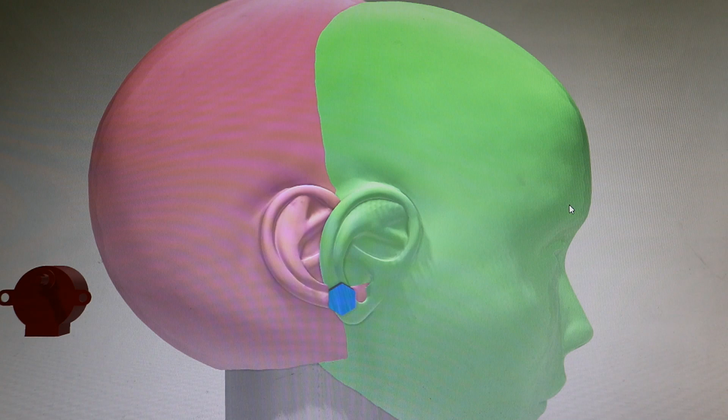My godfathers, what is he doing now, I hear you cry. Well, I feel a bit of a cheat because I haven't got anything physical to show, which is one of the issues with 3D printing. That you do it all, it's all virtual until you actually get around to printing anything.

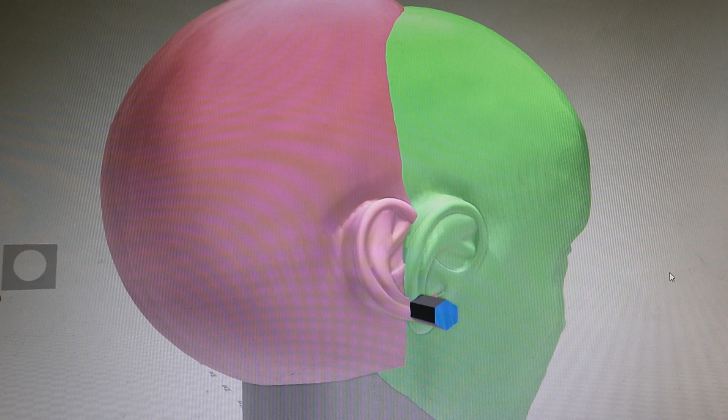And because this head, Victoria, the new Automaton's head, is far more complicated and larger than Florence's was, it is taking ages and causing me lots of headaches. So I've got to the stage and I thought, I've got to make a video because otherwise I'm just going to carry on and never get round to it. And I'm going to forget how I've done things and what I've done.

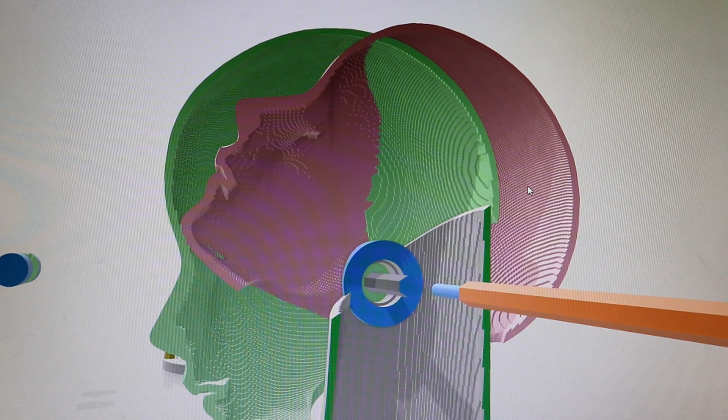So the stage at the moment is, this fine morning with no rain at the moment, is that after much umming and ahhing, and this is the other problem with 3D printing, is you have no constraints really. If you can imagine it, it's probably possible to print it. So, with the aid of my pointy finger, this is going to be brass hex rod.

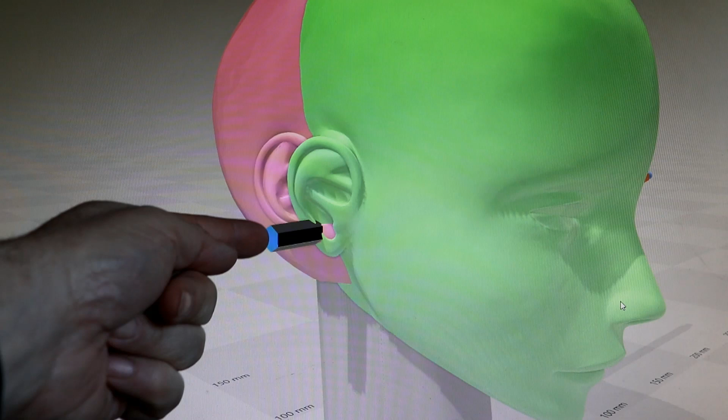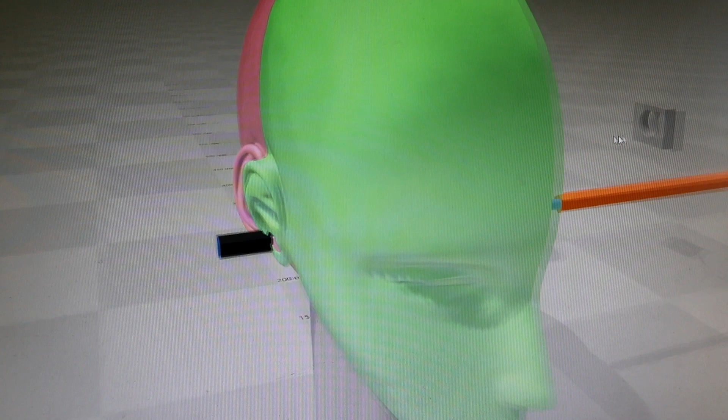I've finally decided how I'm going to, I've obviously not done the fun bit first, no. You know, like the eyes and the mouth. Oh no, start on the most complicated bit first. Oh dear, talk about work ethic. So I've been working on the way of getting her head to angle, look up and down in effect. In the end I've decided to go with the Frankenstein look, which I've got to work something out about.

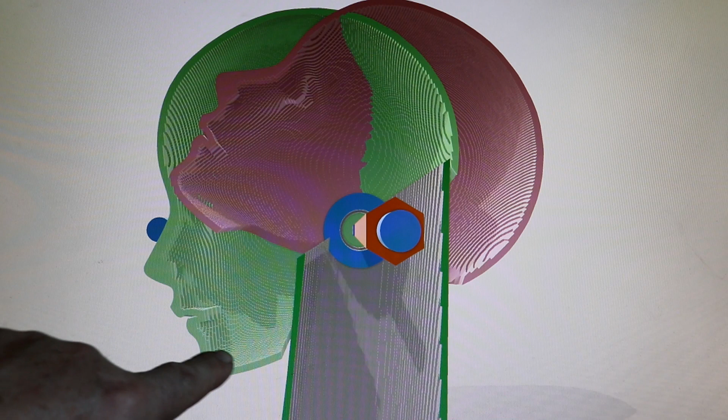What's going to happen is, and there's these two colour heads, just so that while I'm working on this I can actually see the maximum minimum movement. So here, for example, let's get it in view, the pink one is with her looking up as high as possible to make sure this time, doing it properly, that when she's looking up there is room at the back, there's clearance for the neck to go inside. And the green one is when she's looking right down, and again there's clearance there, and I've worked out the position of the axle in the middle.

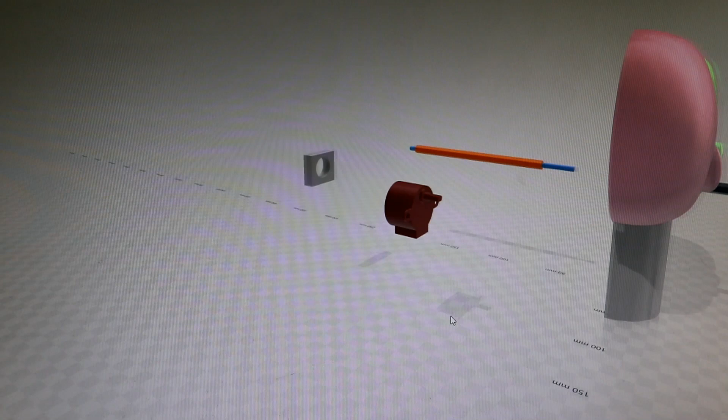What I was originally going to do was, and here's one I modelled earlier, one of these lovely little motors that I've witted on about before, and I might interject a little demonstration just to get into the real world and out of the virtual world. So that might appear in a minute. A quick impromptu explanation of how you can make machines turn, or your inventions.

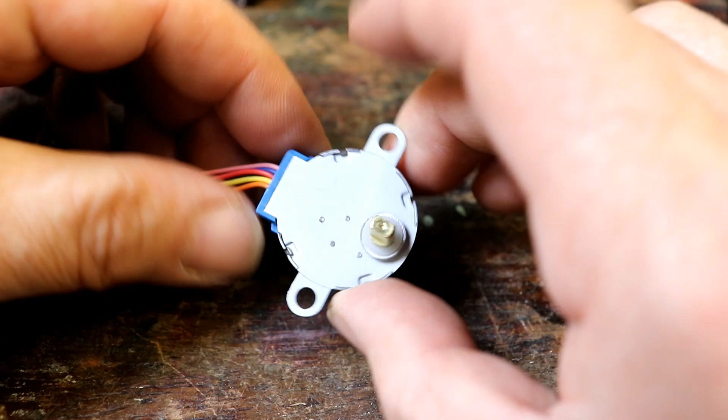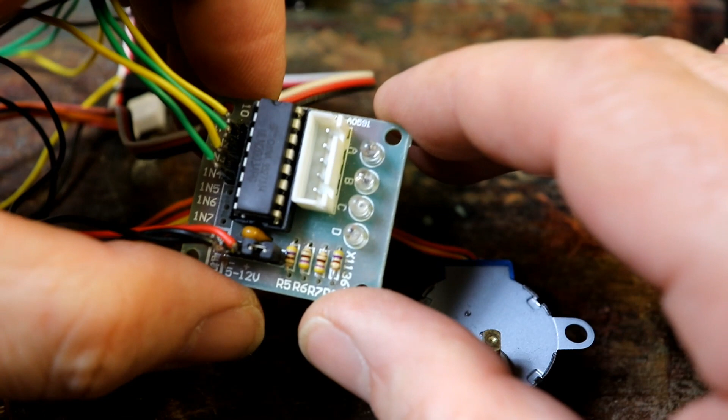Like I said, there's the little mini stepper motor, and these are mass produced for use in air conditioners and things. They come with their own version of this, the little driver board, because each of the 4 coils in the stepper motor inside draws quite a lot of current, uses quite a lot of electricity.

It plugs into this, there's an integrated circuit here that turns a very small voltage that you deliver from your Arduino or Raspberry Pi or something into a much larger current that can drive the motor. It also has 4 LEDs, which is useful, I assume, as an aid to servicing air conditioners and things, because if these aren't flashing on and off, you know the problem lies somewhere this side of things. If they are flashing on and off and the motor isn't turning, you know it's on this side of things.

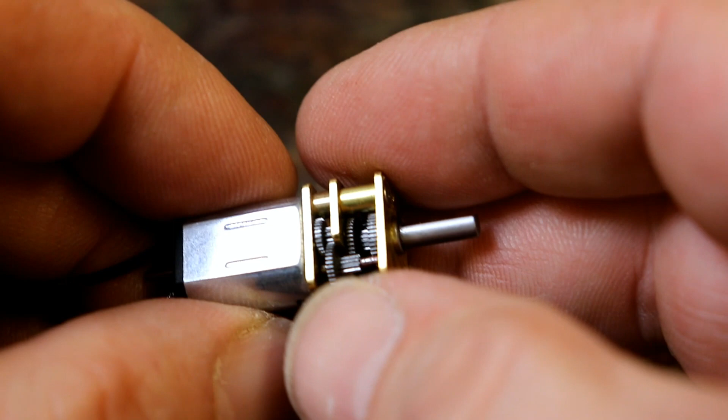So there's that, and there's the servo motor, which I just mentioned to you, and there's this amazing little thing. I think I'm zoomed in as much as I can. No, I'm not. These are absolutely incredible. This is a miniature version, but you can get them in all sorts of different gear ratios. Beautiful little gears. I bought this because I was going to use it on something, and I can't remember what it was. I think it was the climatic revelator, when I was thinking about how I was going to drive it.

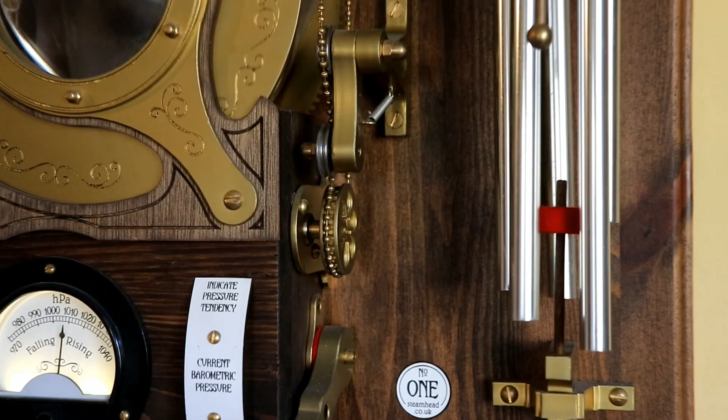The downside of these are, if I can switch a power supply on and switch this on, yeah, there we are. Beautiful. I was thinking I could put a magnifying glass over the little gears so that you could see them all turning. So that's fantastic. And this is on 3 volts. It's geared down so much that I can't stop it.

Downside is, as soon as you mount this on something, that happens, because the friction between all the gears creates lots of noise, and that's what stopped me from using it. Because the little motor at the back, this bit is whizzing around so fast, you get to hear that. And I tried mounting them in sort of silicone rubber surrounds and on springs. Just no good. Not for things if you want them nice and quiet, which is a shame.

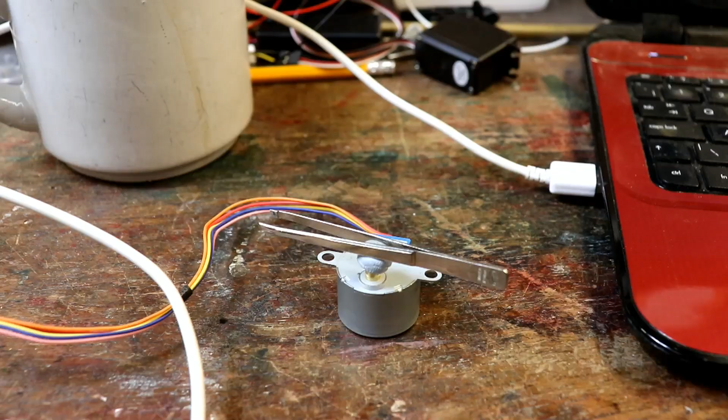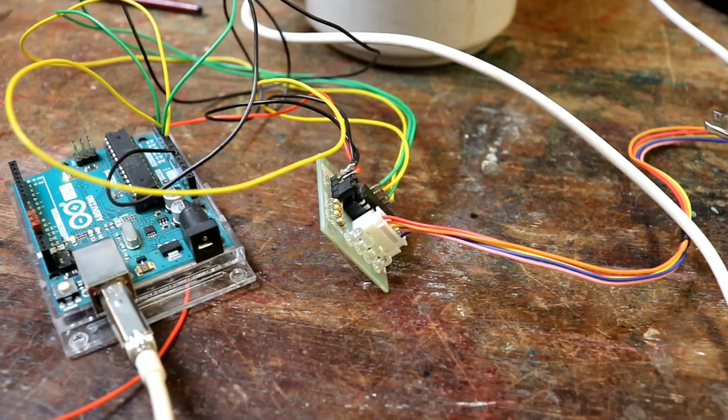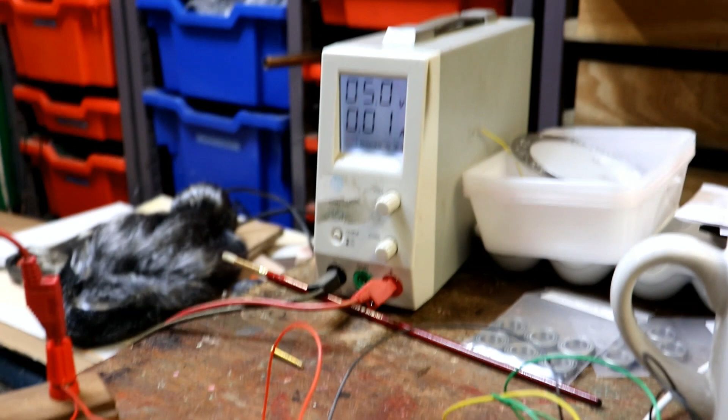Now, to demonstrate this little stepper motor, I have a bit of Blu Tack and a pair of tweezers that were handy, just stuck on the top so you can see it moving. I've got that plugged into the aforementioned interface, and I've got that connected up to an Arduino Uno, which I just think is fantastic. Let me explain why. Also, before I go on, I've got this connected up to the interface, connected up to a power supply, which is set at 5 volts. There we are, 5 volts.

Simply because, like we said before, the stepper motor takes quite a lot of current, and the Arduino will be damaged trying to provide that much. So the Arduino runs the little interface board, and the interface board is connected to the power supply, so it just gets as much electricity as it needs to actually control the motor.

Now, the fantastic thing, yes, another fantastic thing, if I move this a bit nearer, about the Arduino. Right, this is the Arduino IDE, Integrated Development Environment, and it's a bit of software, an application that you can download, and it's all free. It's absolutely fantastic, brilliant community developing and sharing, creating and everything with this.

And you click on File, you can go to Examples, and there's a lovely library called AccelStepper. There it is. And you just click on AccelStepper, and then it gives you all these examples. It is such a fantastic idea, because you need some sort of starting point if you're going to start using stepper motors and don't know anything about them like I didn't. So there's one, Bounce. So I just click on Bounce, and it comes up. So you open that up, and then you can just run it.

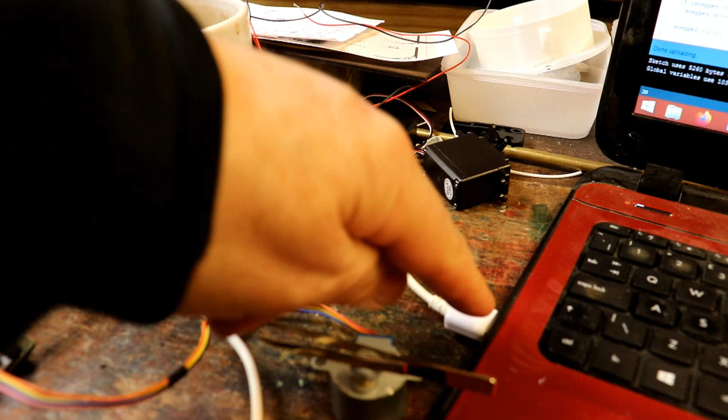Upload it to your Arduino by clicking on the little upload button, so it compiles it, uploads it, and sends it simply through the USB wire into the wonderful Arduino. Once you've uploaded a program into here, you can unplug the USB wire, and then every time you switch the power onto the Arduino, it will just carry out the instructions that it's got. So let's see. It's now uploaded it. Would you Adam and Eve it? There we are. So this is the Bounce one.

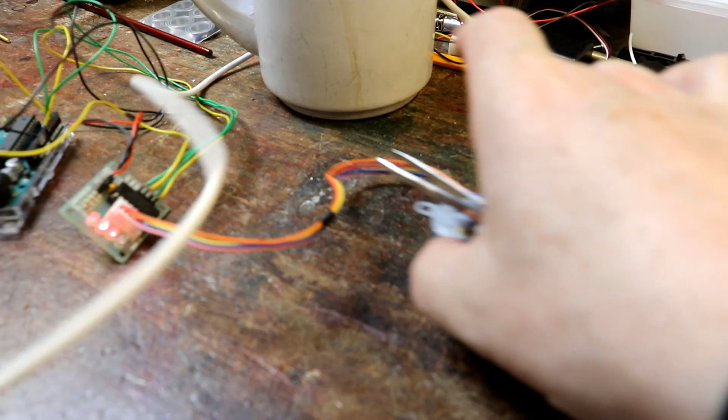You can get lots and lots of other stepper motor driver libraries, but I do like this one simply because it's got the acceleration. You can set how quickly you want it to accelerate and decelerate, which is perfect for automatons and machines in general, because it decreases the amount of force applied to gears and things when it first starts moving. Just gently starts, gently slows down, which is fabulous.

And the effect you get, as you can see, it speeds up, then moves around a set distance, and again that's really useful with stepper motors, being able to control precisely where they point. Because you can count round, in effect 64 of these little separate steps will do a full rotation, so you can very accurately work out exactly where it's got to go. In fact, I think it's more than 64. I can't remember. It's a lot anyway. So that's the stepper motor. Thing is that the Arduino doesn't have a clue where this is. It's so easy to forget that.

Oh, and before I say that, libraries. Now, there are lots and lots of very kind people in the Arduino community who will write a piece of code to do a job, like run this stepper motor, and they will then convert it into a library. And the libraries are free to download. There's tons of them, anything you can imagine. Someone's written a library for you. You just download it, very easy to put into Arduino, and then you can use it.

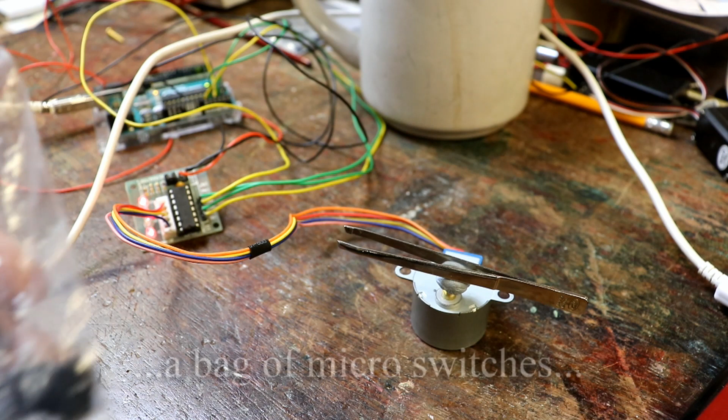One very important thing is to let the Arduino know where this is, because it needs to point. For example, with Florence, when I switched it on, I needed to know that the motor that controlled Florence's neck, which whether she faced right or left, was right in the centre. And you do that by adding a sense to the circuits of feedback. And the easiest way of doing that is to use some sort of switch with motors.

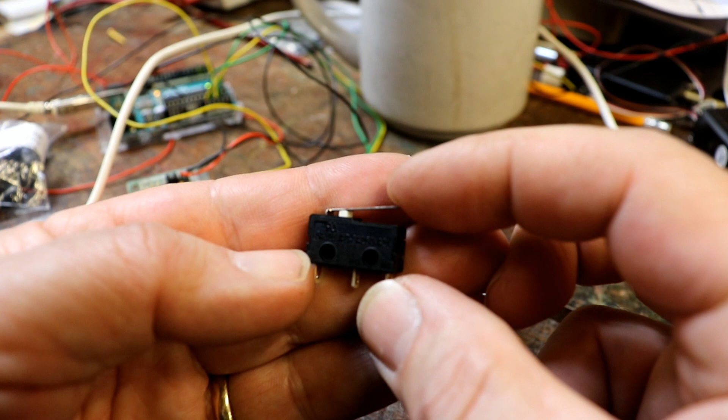So you could have a little micro switch like this. Let's put it on autofocus. Here's a little micro switch, a miniature one. And they have a lever usually on the top, and it doesn't take much force, but they have a really good mechanism inside that millions and millions of times will work perfectly, very little force.

So on Florence there's one of those at the back, and when you first switch her on, the Arduino tells her to turn left and keep going left until the switch clicks, she's hit it. Then it knows where she is, so then it can say, okay, turn however many steps back to face the front. So there's that.

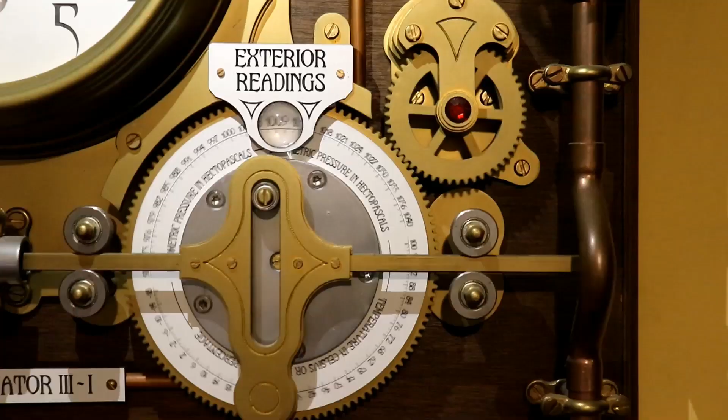Or if you don't want it to stop and want it to keep going round and round and round, like with the barometric prognosticator, where there's one of these stepper motors turning the readings dial and also controlling the pitch of the flute, you can use one of these reed switches.

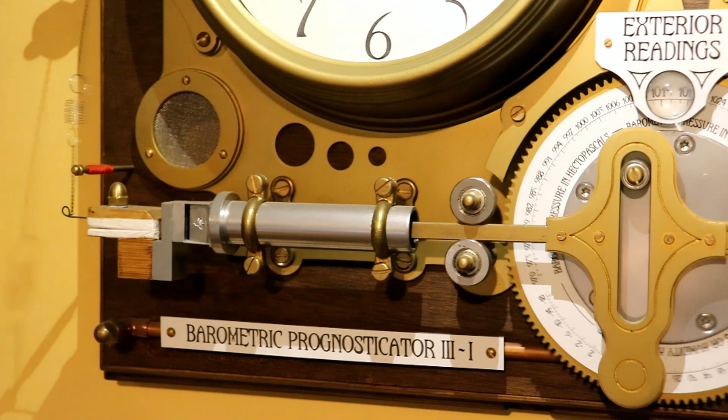And you can see how small they are. You can get them larger and smaller than this, and I can't zoom in anymore because it'll go out of focus, unfortunately. I'll need to invest in a better lens, I think.

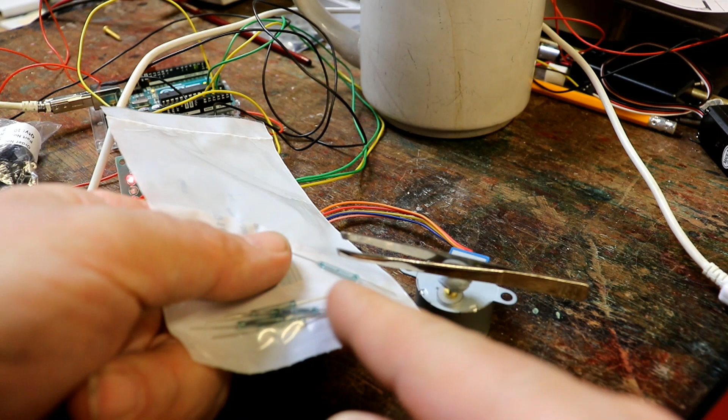You have a little magnet, very small magnet, fixed onto, say, the end of these tweezers, and underneath, or hidden away somewhere, you have a little reed switch. And then as this passes, it switches the reed switch on. And then you can use that connected to the Arduino, another pin on the Arduino, to say, okay, I'm here, set everything to 0, I now know where I am.

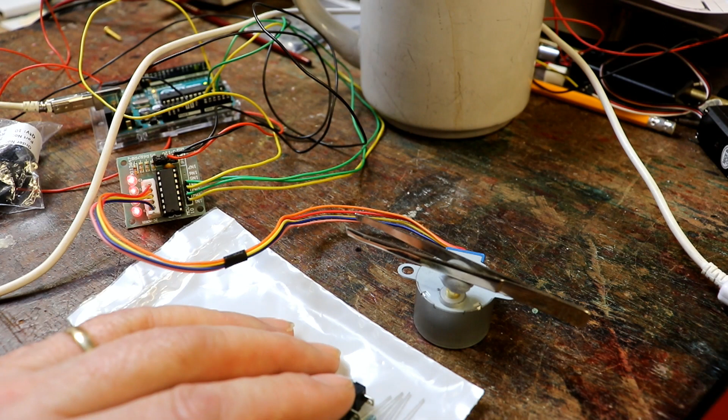I was going to wire all these up and show you, but I'm now aware, I've started speaking with only the dog to keep entertained and my own voices in my head. I can't stop speaking. I must stop. Perhaps I will just wire up one last thing before I stop speaking, otherwise this video is going to become my life story, which I wouldn't inflict on anyone.

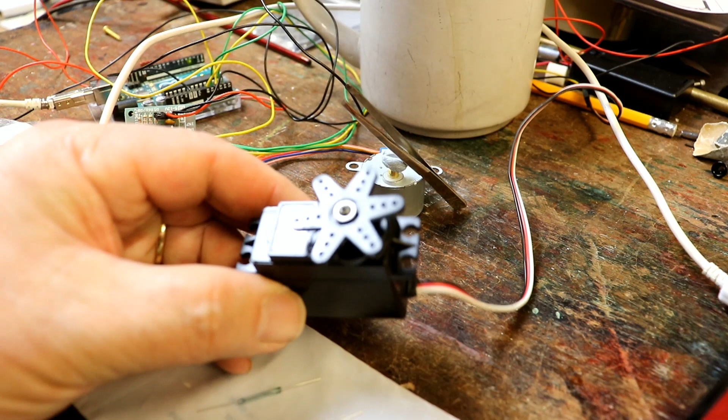I will connect this up to another library and show you that working, show you the difference. So I've connected the servo, so what I do is I go to File, Examples, and go down to Servo. And there's two options, one controlling it with a knob or another one sweeping it backwards and forwards. So I'm going to click on Sweep, and here it is.

Isn't that incredible? And it says attach the servo control wire to pin 9, which I've done, and then just click on compile and upload. There's the servo motor, and it's 3 wires. Again, because servo motors use quite a lot of electricity, the Arduino will be damaged trying to run it off that.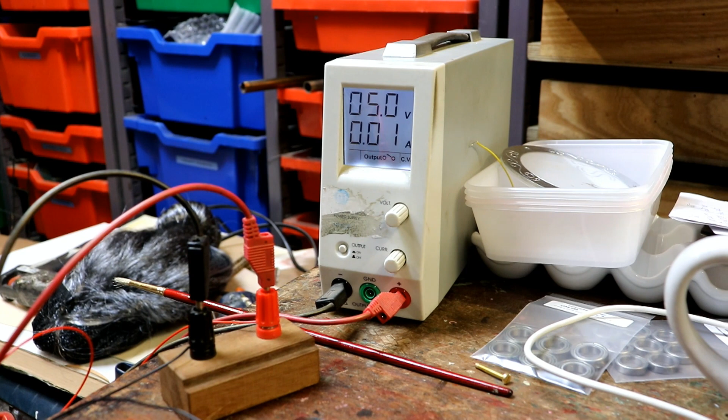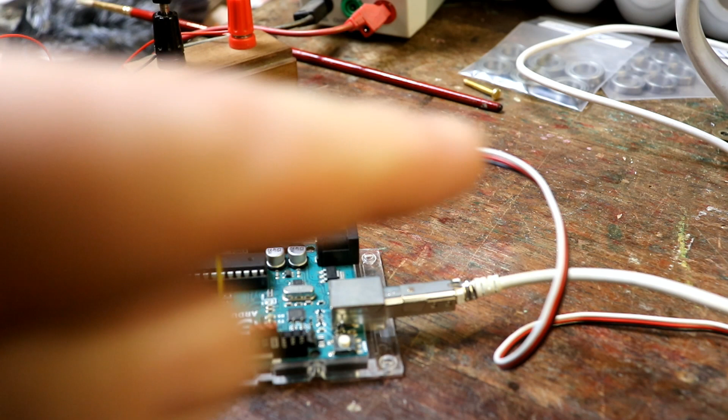So if you can see around all the spaghetti and stuff, all you do with a servo motor is you have positive supply voltage, 5 volts, which I'm supplying again from the power supply, so it's not taking any electricity out of the Arduino, so to speak. I've got 0 volts coming along to 0 volts on the Arduino and 0 volts to the servo motor, and I've got the signal wire from the servo motor, which is the yellow wire here, going to number 9. And they're the only connections you need.

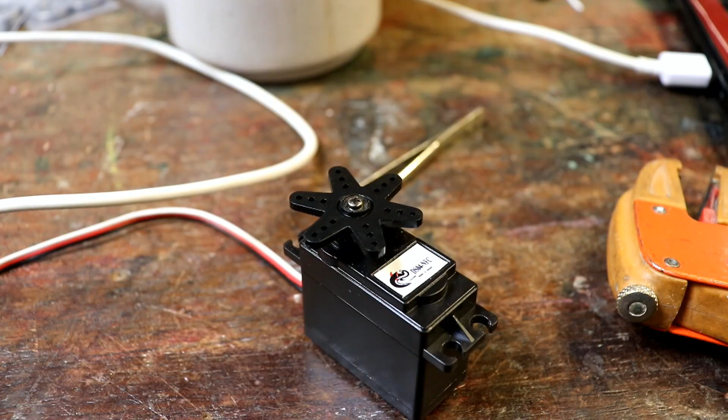The power for the Arduino is actually coming from the USB wire at the moment. That's absolutely fine. So it's uploaded now, so let's switch it on and see what it does. So the example, the sweep example, sends it right around one way and then back the other way. And you can see there's no control over speed.

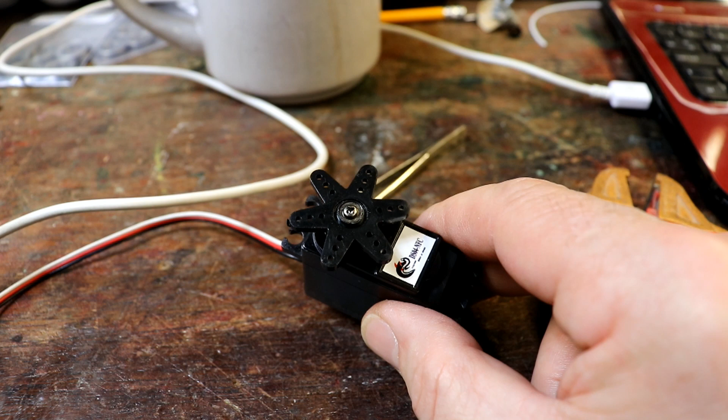The only way you can control the speed of a stepper motor, like a servo motor, is to pulse it. Just tell it move around a little bit. But you can see the jerks, and like I said before, it does put quite a lot of force on all the gears and mechanisms. So very useful for some things, little things, although these have got an awful lot of force. I don't know how many Newton meters this one is, but they are very tough, and the better, good quality ones have real ball bearings in them, metal gears.

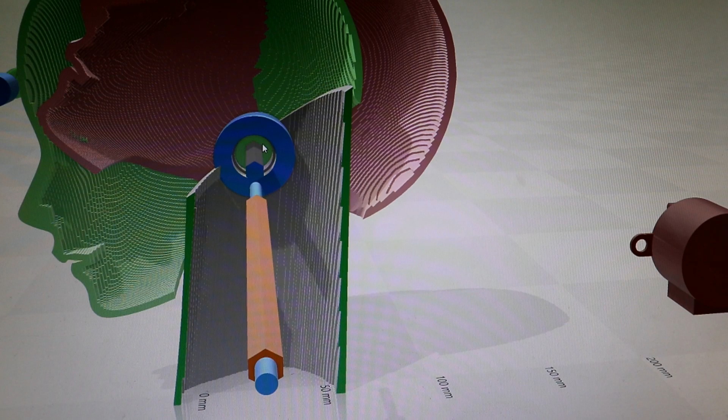So, and I was thinking, wow, let's keep this simple, because we're so good at keeping things simple. Have one of those here, possibly one both sides, directly linked, fixed to the neck and linked to the head. And then you can use the bearings in the motors, and you can use both motors, one wired backwards, so they turn the head. Oh, I can't even remember, sleepless nights and all the rest of it, trying to figure out this, that and the other, and I think I decided it's not worth it.

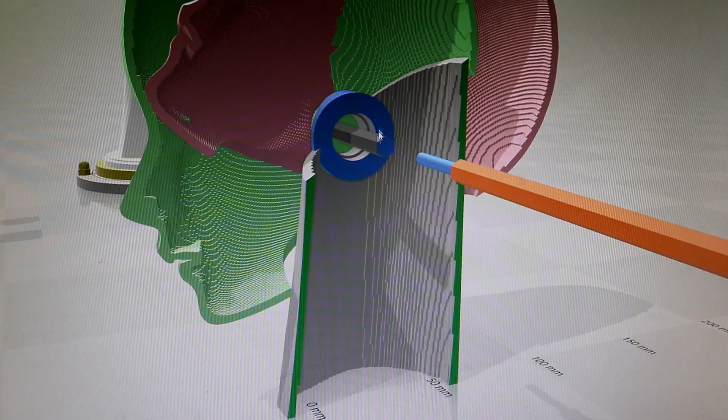This has to be designed, if it's going to be used in bars, restaurants, libraries and all the rest of it, hopefully as a marketable product, it needs to be 100% reliable, or as near to that as I can get it. Obviously nothing is 100%. So in the end, I bought some bearings, and I've got some of this brass hex rod. The good thing about using this hex rod is it grips. If you mould the hex shape in the head, and in a gear that's going to go on here, you know that it can't slip.

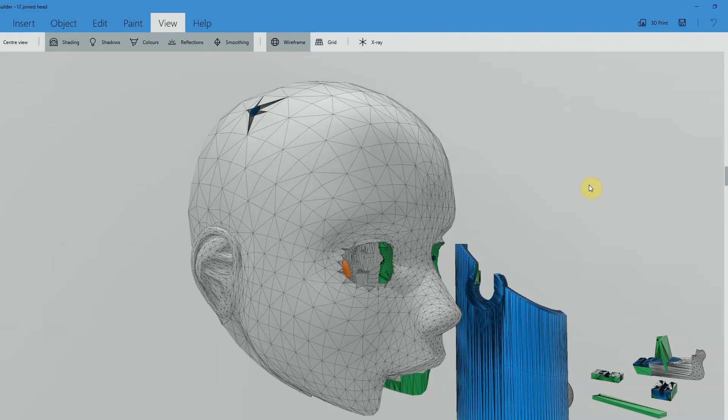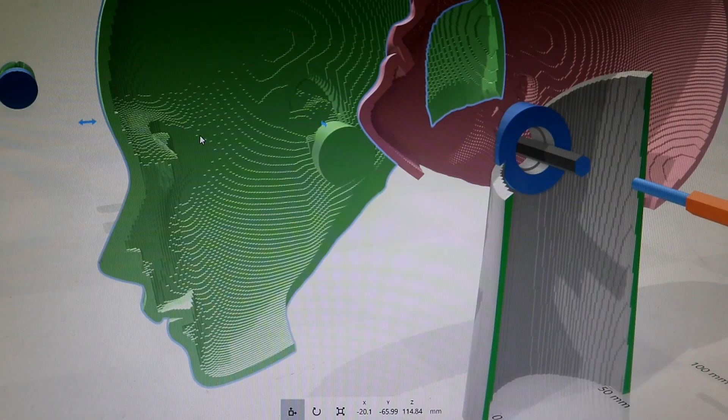If you remember back to Florence, she was quite lumpy, and as someone very kindly pointed out, there's an amazing piece of software. Well, it is absolutely incredible. Very, very difficult to use. It's just too complicated for intuition. This is nice, 3D Builder, because it's for children and for me, because I don't have to read any instructions. And like old dogs and new tricks, I've found it fairly easy to come to terms with. But let's have a look at the software called Blender.

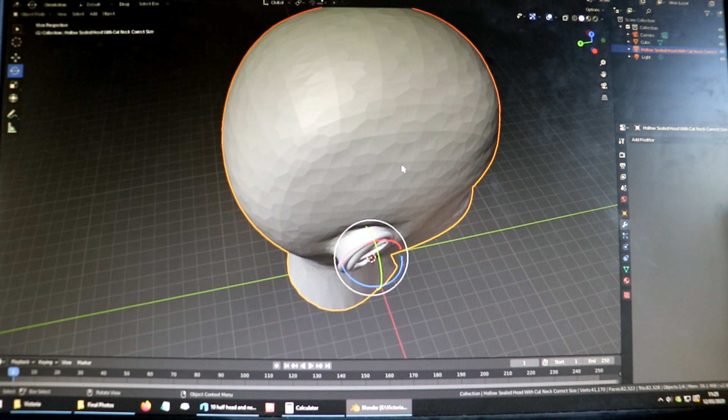You can see, if we zoom in, all the facets on her head. And like I said in the last video, I don't want her looking like Kryten from Red Dwarf, so I want to smooth that out. And there is a fabulous tool, I think actually it's under here, Add Modifier. Oh, it just does so much, it's crazy. But it smooths it out and breaks each one up into more surfaces, which is great. So having spent an awful long time working on that, and then filled in the eyes and mouth and stuff, because that's one thing that 3D Builder doesn't like, I imported her into that. And that is an extremely long story cut short.

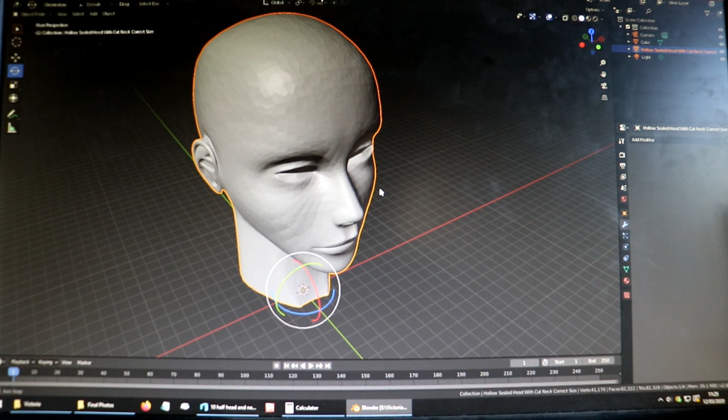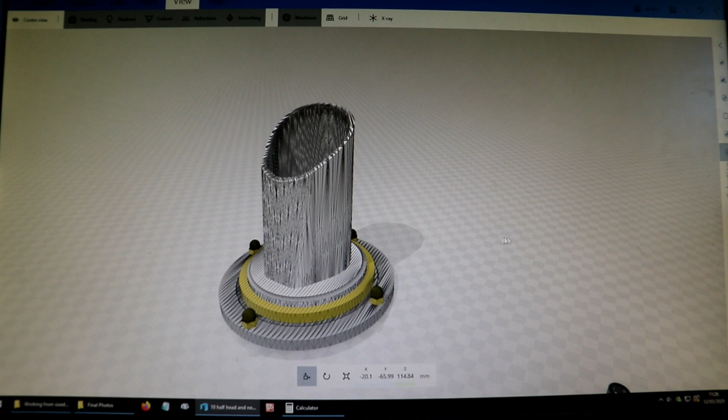The other thing I've been working on is, here we are, let's zoom out a little bit. This is the neck. And the lovely thing about Blender is you can move and select individual points on the wire mesh. I can show you the wireframe, there we are. There's all the little separate bits that go to make it up, each one being flat, and then there's lots of them so you don't notice that they're flat.

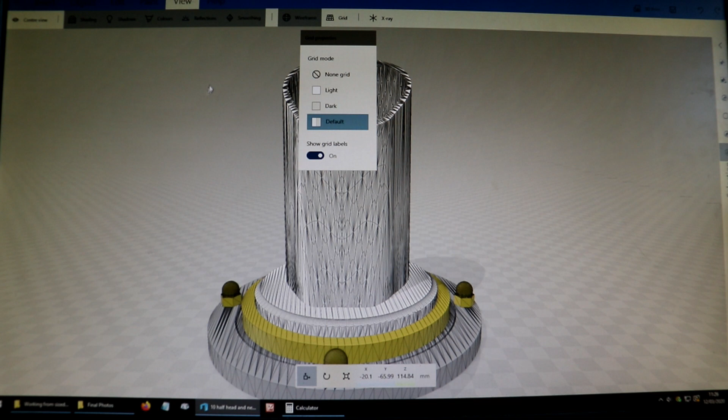And they're all the little shapes that go into making up the overall look of it. I can't remember what I was going to say. Oh, the good thing about Blender is that things like the neck, with this one you can... With 3D Builder you can cut things and stretch things and stuff, like extrude things, and that's great, but they stay with the same outside circumference or outside shape.

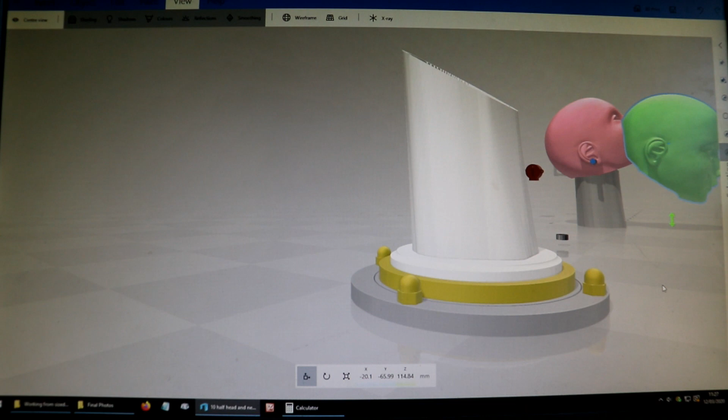Whereas with Blender I was able to stretch the neck down and carry on increasing the shape of it and everything, which is lovely. The other thing I've been looking at is the bearing. I don't know why I'm getting so completely confused by this. I think because I'm working in a virtual world, everything is open to so many possibilities. The limitations are not there because I've not got two lumps of metal that I have to stick together and there's a couple of ways of doing it. It's just too much choice. I think that's what the problem is.

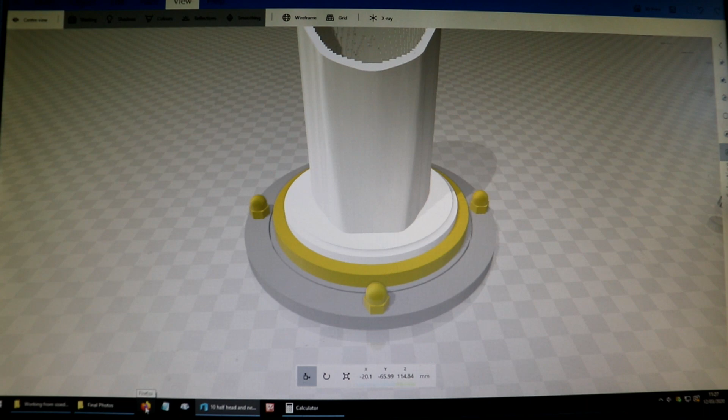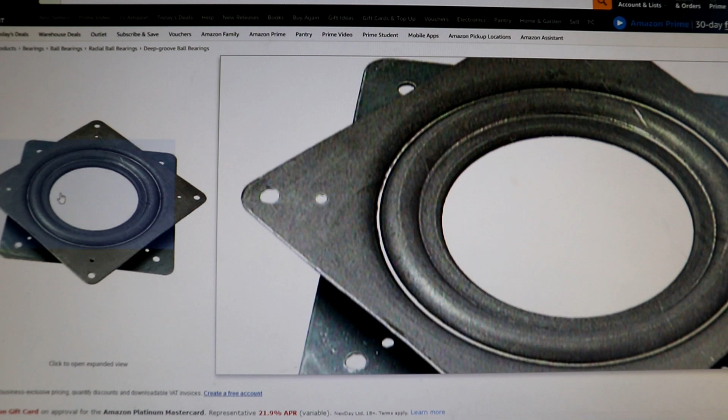But I've found some Lazy Susan bearings. In fact, I will show them. This is the version I used for Florence. It's pressed metal and it's square obviously, which didn't matter because I hid it down underneath Florence. Between the two metal plates there are a row of ball bearings, or a circle even of ball bearings fixed between the two. Well, I might use a pointer, there we are, fixed between this bit.

They run round in there, it's hooked over and fixed underneath, so they won't pull apart. And if you push down on it, as you would with a Lazy Susan, it's fine, there's very low friction. But I noticed with Florence that obviously you can't pull it up. If you pull it up at all, rocking from side to side, then you just have the friction between the two metal pressed surfaces. So that was no good.

So let's have a look at another one I found, which I have, here we are. So it looks like that, and it's made of aluminium alloy, and you can just see a few of the steel balls in there. And with these bearings, there's a rounded slot in the centre bit and in the outside bit, so the balls are captive between the inside and outside. That means that the balls hold them together, so you can push force downwards, you can push force upwards, you still have very low friction.

There's another drawing. So that's my current plan, and these are 140. They come in all sorts of different sizes. They're brilliant things. As always, you have to spend hours looking past all the lying Google adverts and say, oh yeah, they're only £3.50 and no delivery, and then you look it up and suddenly they've gone up to 18 quid. Ridiculous.

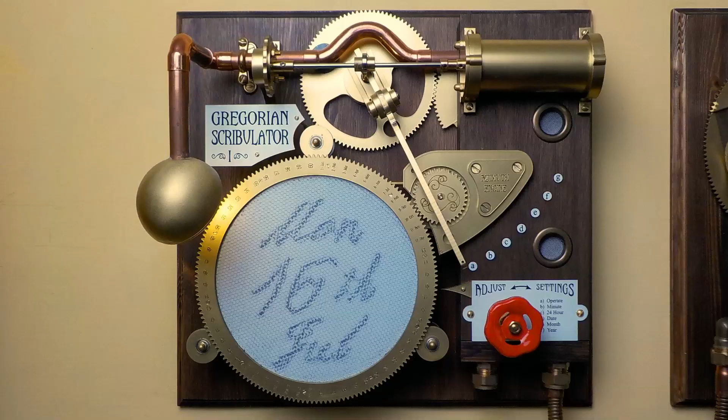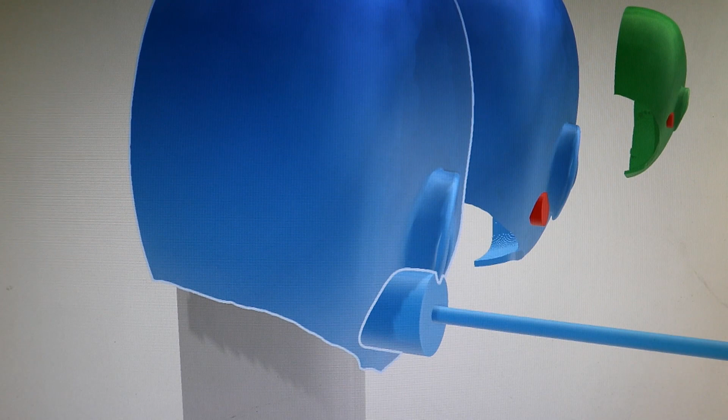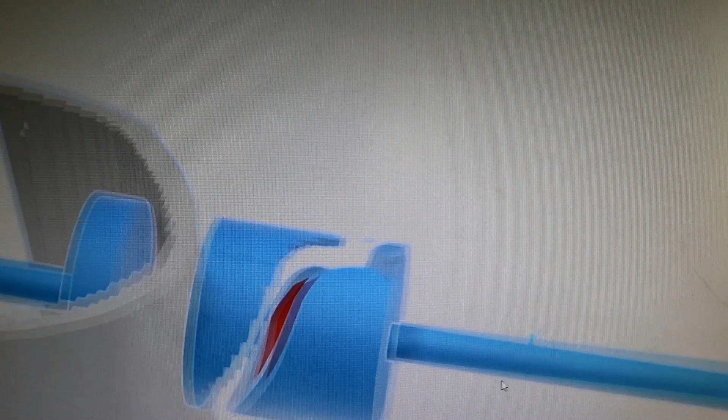I've got to show you this, it's just incredible, it really is. I will click on this head and I'm going to subtract this head from anything that it goes through using the subtract button. Look at that, isn't that incredible? It's mind-blowing, it's so clever. So here we are, look, this is the bit of this extra part that was through the head. It's deleted wherever it passed through the head.

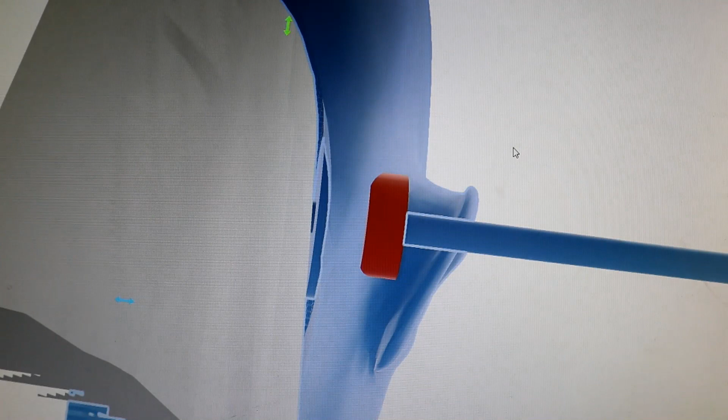So what I can do now is remove everything. I don't want this bit because that's the bit that's stuck on the outside, so I'll delete that. I don't know what that little bit is, but I don't want it, so I'll delete that. I just want this bit. As you can see there, I've got this new piece in here. I made it a little bit long.

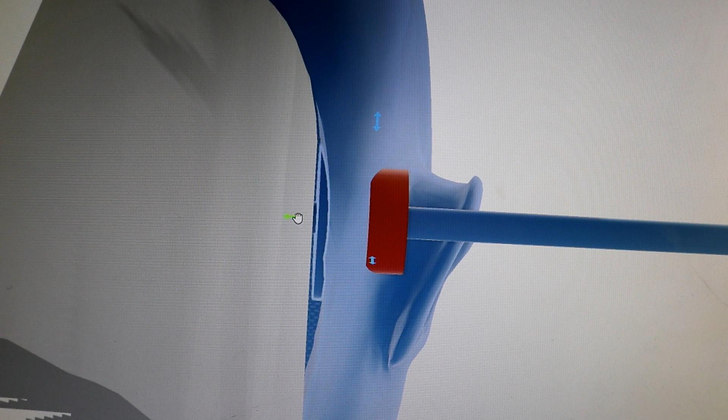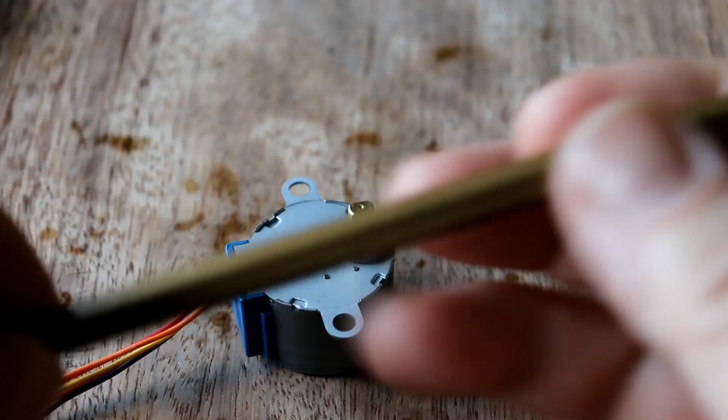It's going to be annoying because it's going to bang into that. So what I can do is to bring it over, just line it up. So there we are, you can see it's just lined up flush with the inside of the head. And here, ladies and gentlemen, there's a piece of the 1/4 inch, obviously, got it off eBay some time ago and I just want to use what I've got.

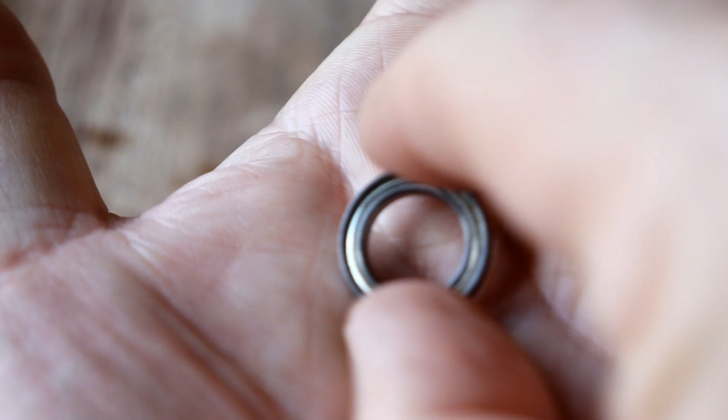So this is great. And what I did, I measured it, as is my wont, and got one of these bearings which I had. If I can zoom in, come on bearing, there we are. Got one of these bearings which I got from Technobots online, which are a very reasonably priced place to get bearings. I wanted one with a large middle bit because I wanted to print an insert like so. You see, this is a bit crumbly at the back, but I don't care about that.

And that fits perfectly in there, and then that in turn fits perfectly within the bearings. And now I've got a really nice way of supporting the end of the brass, and using bearings means that friction will be kept at an absolute minimum. This is going to support the head against the neck. And then I printed this little bit just to get the diameters right, because 3D printing doesn't come out exactly the right diameter that you've asked it to.

So let's put that in now. Then you can see the cunning plan. That just pushes beautifully in there. And then this brass bar can continue through that. But that, won't it focus? But that's perfect now.

Well, the other thing I've been working on, from previous videos, you may remember that my wife kindly made a kraken out of clay, which I then sprayed up and used photogrammetry, which is not a huge learning curve, to turn it into a file on the computer that I could then print. And I did some experiments with metallic filament for the 3D printer, and it just looks incredible. Absolutely amazing, because once it's scanned in, you can print little ones, or big ones.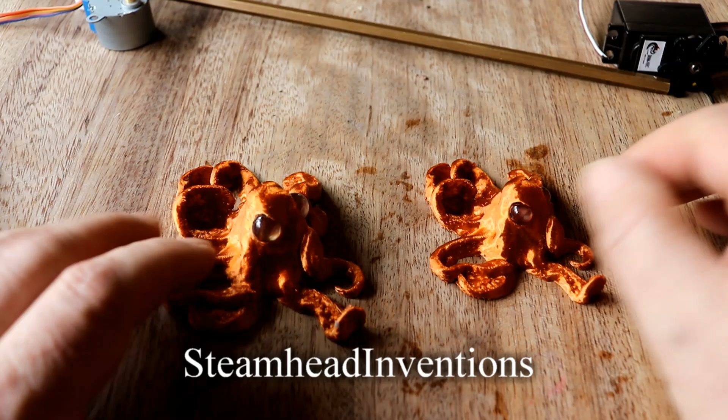And here's the beautiful dog who wants her lunch.

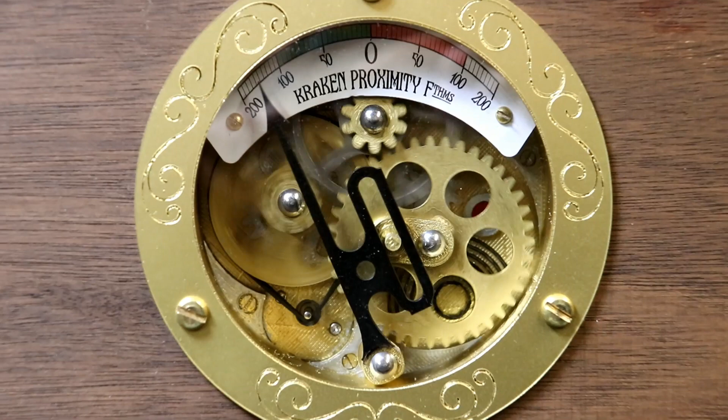And I've been making lots more kits. I'm thrilled to bits that the gauge kits are so popular. Denmark, I sent one to. France, Italy, US of A. It's amazing. Fantastic, and loads to this country.